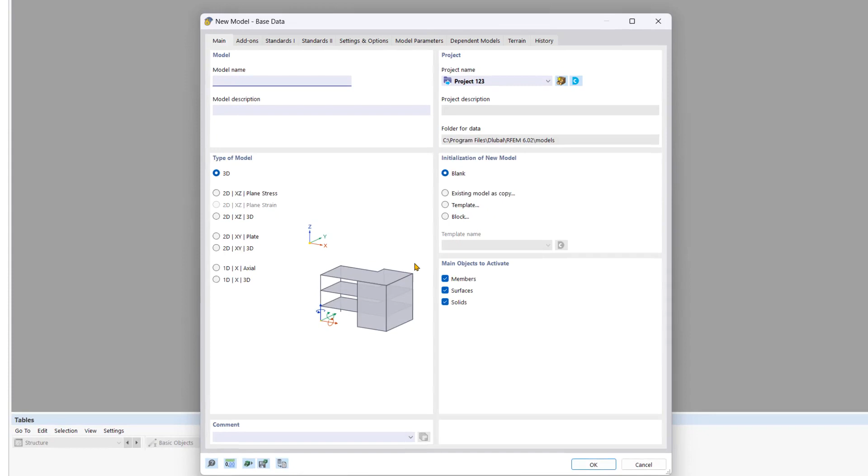In the new window, we will define the base data for our model. The window is divided into several tabs. Let's begin with the main tab. Enter the desired model name, along with a description if you'd like.

In the project area, you can assign the new model to an existing project or create a new project to save your model. For this tutorial, we won't create a project.

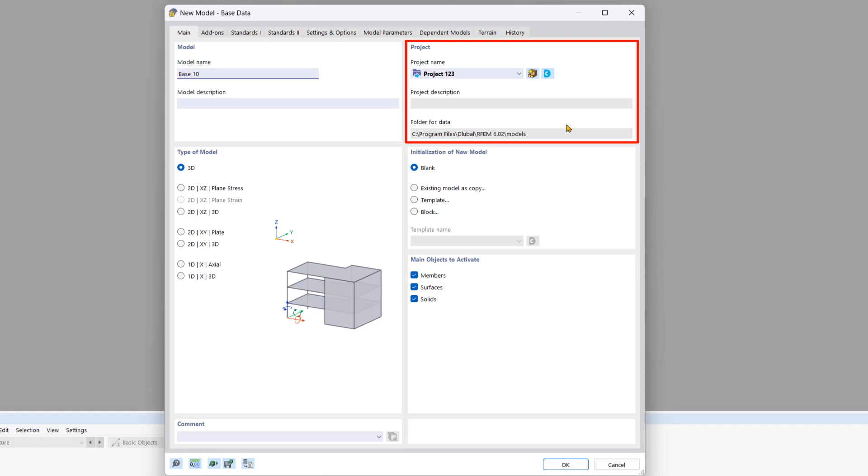In the type of model area, you can select the kind of model you want to create. You can choose between one-dimensional, two-dimensional, or three-dimensional models based on your requirements. RFEM 6 also allows you to create one- or two-dimensional models with three-dimensional loadings and a bitmap that can be used for visualization.

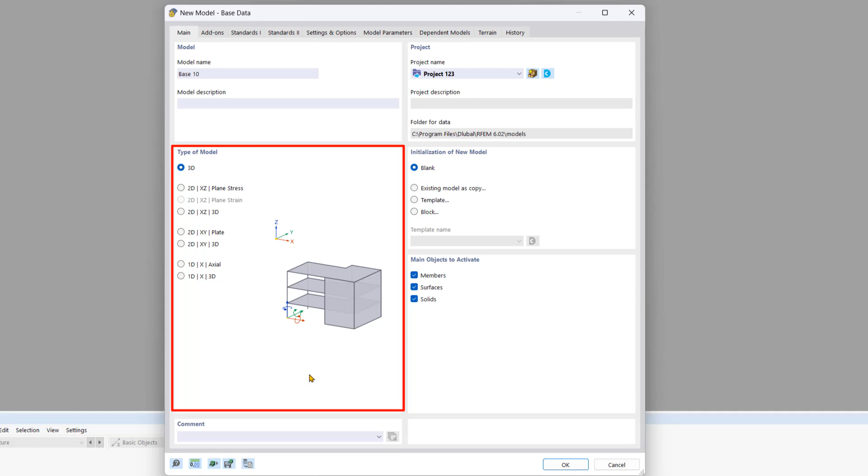To define the units and decimal places, you can click on the symbol in the bottom left-hand corner. This is where you can select the desired category on the left-hand side, and then you can set the units on the right-hand side.

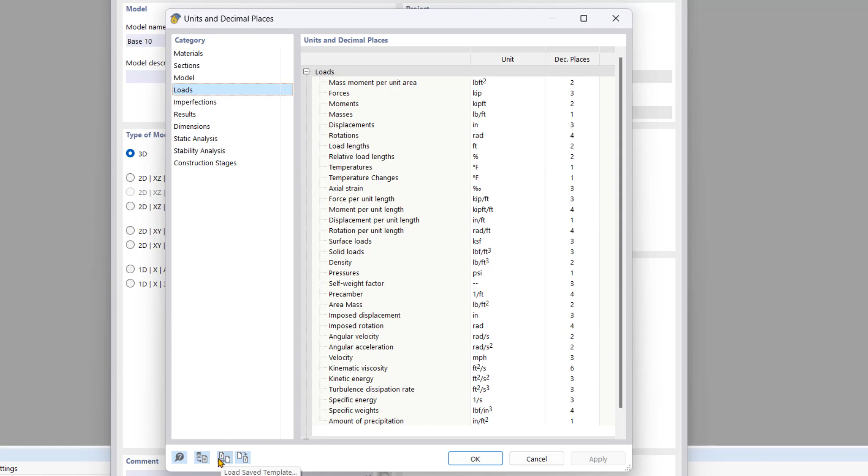You can also switch between imperial and metric units by going down to the symbol here and clicking Load Saved Template, selecting between imperial and metric, and choosing the default on the right-hand side. We're going to stick with imperial and click OK, and then click OK again through this dialog box.

Now let's move on to the Add-ons tab. This is an important change to note compared to RFEM 5. With this change, now you can define certain design parameters while you're modeling, which saves you time.

Up in the top right-hand corner is the standards for classification and wizards area, and this tool allows you to define load combinations, wind loads, and snow loads automatically if you have these options checked on. For this tutorial, we will activate the Structure Stability add-on along with the Steel Design add-on.

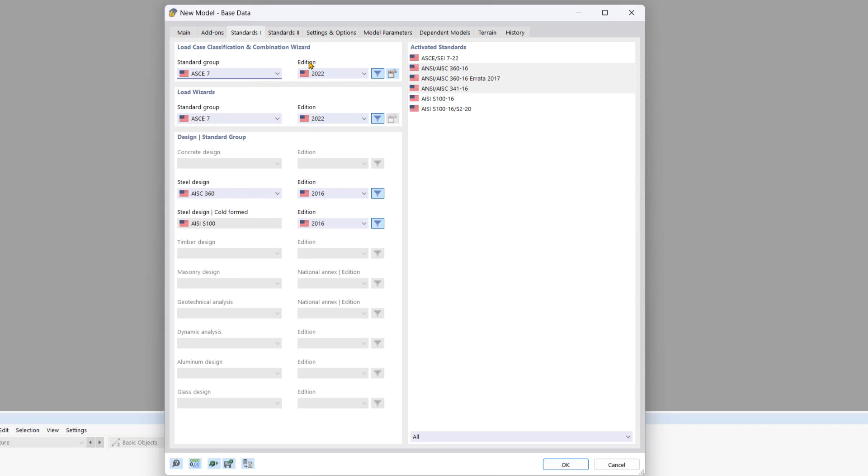Now let's move on to the Standards tab. This is where you can select your desired standard, along with the National Annex if applicable. You can also choose the design standards down here as well.

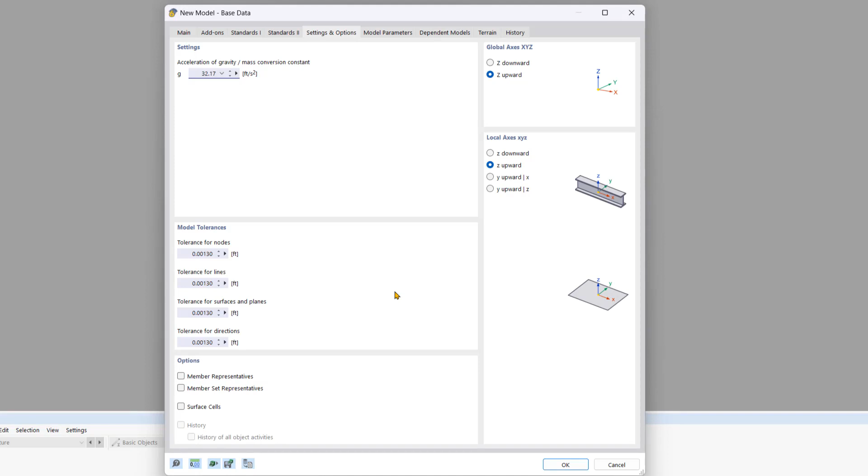Next, we're going to go on to the Settings and Options tab. This is where we can adjust additional settings like the acceleration of gravity, directions of axes, and model tolerances. For this tutorial, we're going to keep all this by default and move on to the Model Parameters tab.

In this tab, you can enter the exact location of your structure. With this, RFEM 6 can automatically determine wind, snow, and seismic loads based on the selected standard and annex. There's also an option where you can import the location from a map using this symbol.

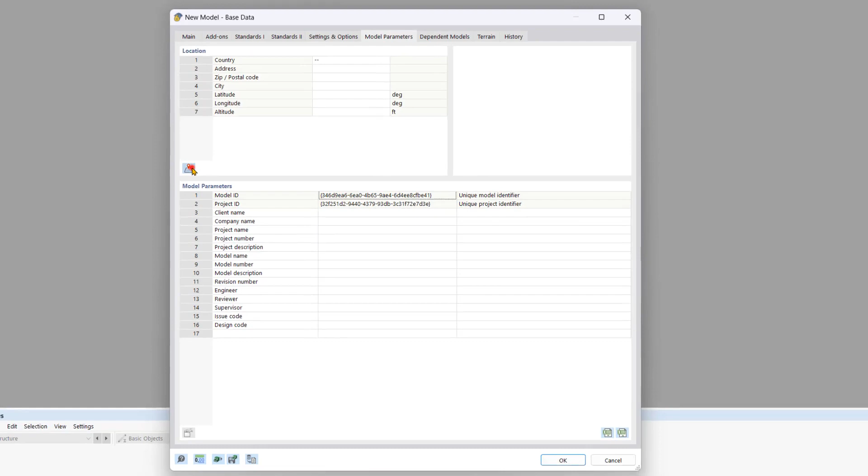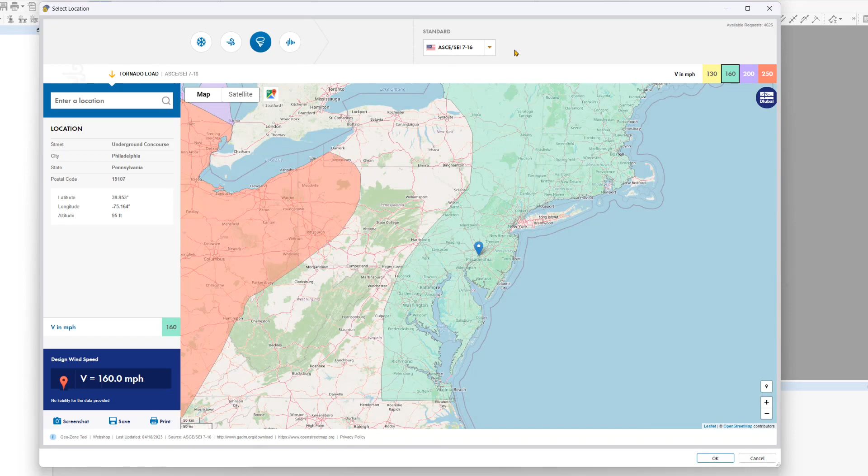For example, I could type in Philadelphia and choose Philadelphia, Pennsylvania. Then, based on the standard, I can see all of the parameters for snow, wind, tornado, or seismic. Once I click OK, this information will be loaded into RFEM 6.

We aren't going to cover the remaining tabs in this tutorial. Once you've made all the necessary changes, click OK.

Another change in RFEM 6 compared to RFEM 5 is that once you click OK, the file does not yet exist. So to save the file, go up here to File and click either Save or Save As. Click OK. And this is where you can select the storage location of the file.